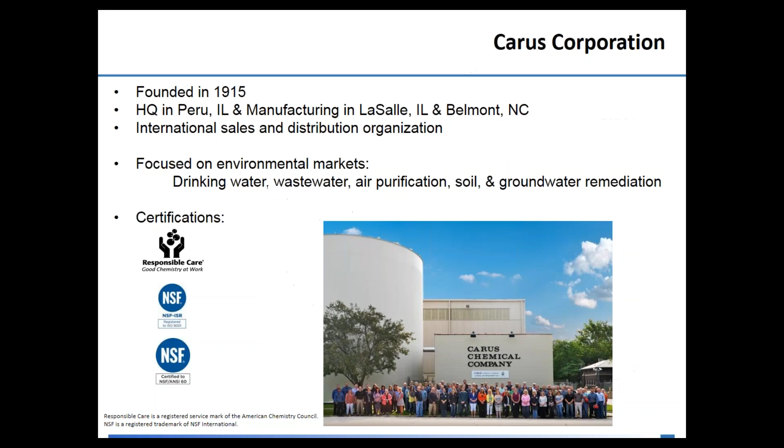So, Carus is located, as I said before, with headquarters in the US, close to Chicago. Then we have European offices in Spain, close to Oviedo. Then we have direct sales or sales through agents on a global scale. So we have representatives or distributors. We have just concluded a distribution agreement with South Africa, and we have many of these agreements through Europe and all the globe.

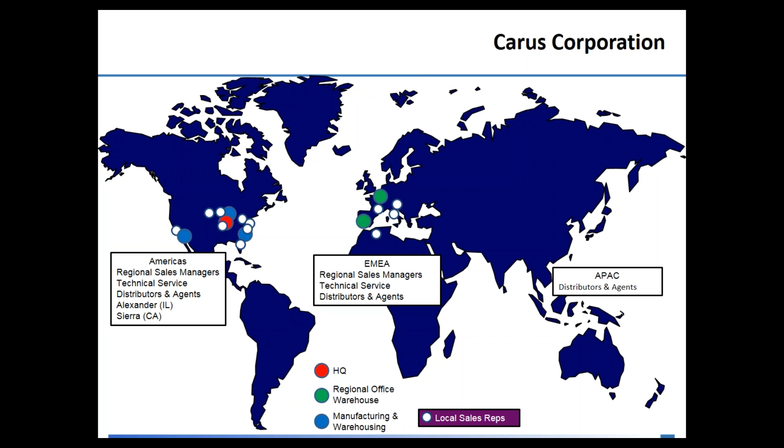Simplified science, this is our claim. So everybody knows remediation is complex. It's not exactly easy stuff. In situ remediation even more. So the idea of our technologies is to propose technology which makes things simple.

Simple doesn't mean inaccurate, but means that we try to provide chemicals that can be used in an easy way, because we know that when you are in the field, you cannot have too many things to do. So you have to be focused on in-field activities, you have to be focused on safety.

This is our portfolio of products. Chemical oxidation: we have permanganate-based products RemOx S and RemOx L. We have sustained release reagents based on permanganate, which is RemOx SR+, and Persulfate SR based on persulfate. Biological technologies: we have aerobic, IXPER and Oxygel; anaerobic, the Cap18 family of products, including Cap18Me and ABC-Ole.

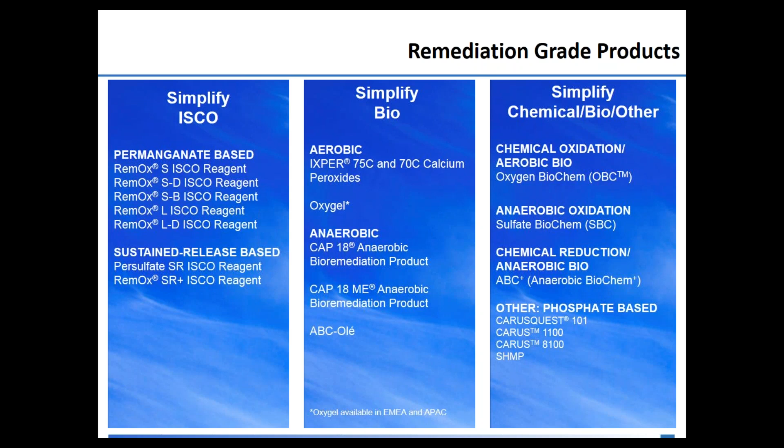And then we have OBC, which is the chemical oxidation aerobic bio based on activated persulfate, and SBC, which is a bioremediation product to stimulate sulfate reducing bacteria. Then the last product that we have is ABC Plus, which is anaerobic biochem. It's a carbon substrate additivated with zero valent iron for reductive dechlorination, mainly for chlorinated solvents.

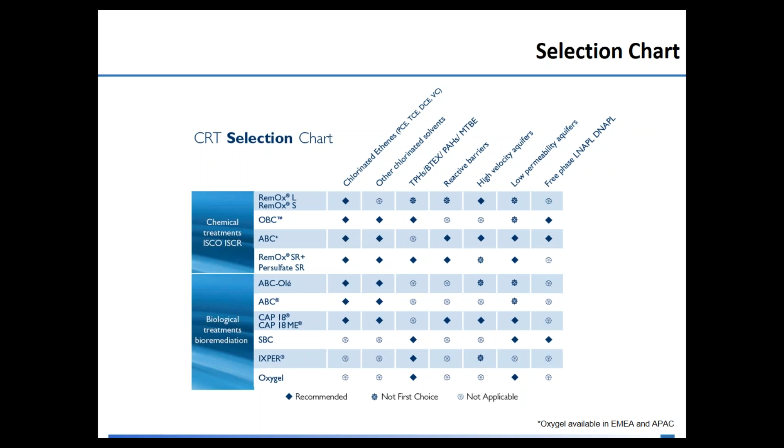Here is a selection chart that you can use for a preliminary screening of our technologies and of the contaminants of concern, of the issues that you can find. So for instance, if you follow the OBC line, you can see that OBC can be used with the chlorinated ethenes, other chlorinated, and you can use it with the TPHs. And the same with SBC, you can see where it is suggested and where it is not suggested.

Chemistry and biology. So today we will talk about a product which is OBC, which combines chemical and biological action, and we will talk about SBC, which is mainly a biological treatment. We know that the general perception of in situ treatment is that biology is much more friendly than chemistry. From the other side, biology can be much slower.

Coupling the two technologies allows us to get the best of each one, so we can work on the fast characteristic of the chemistry, coupled to the fact that the biological treatment is generally considered a mild treatment and can reach down to very low target levels.

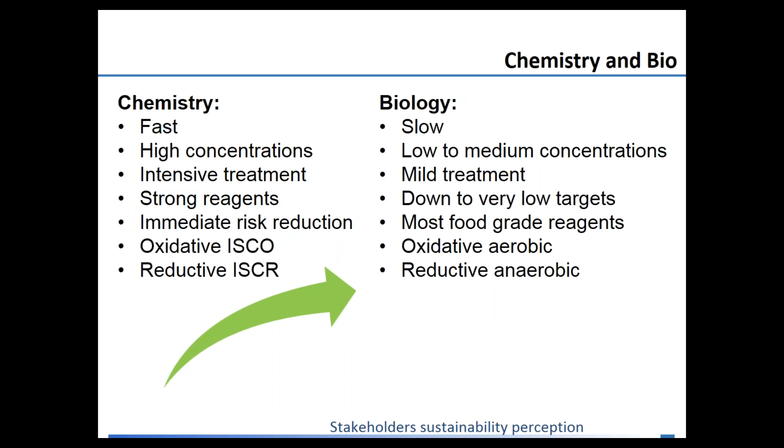The technology selection criteria mainly are based on concentration and area. We can consider the source area, where most of the contaminant mass is located, but with a very small plume size, and then outer areas that we can call plume areas, where mainly the contamination is dissolved, where we have a very big plume size, 75–20% of plume size, but the mass in the dissolved phase is much lower with respect to the source area.

This reflects on the kind of technology that you can apply. Of course, in the source area, which is small, you can use a technology that allows you to put a lot of effort, a lot of money, a lot of energy per cubic meter of soil, while in the other areas, different technologies which require a less intrusive, less invasive approach can be used.

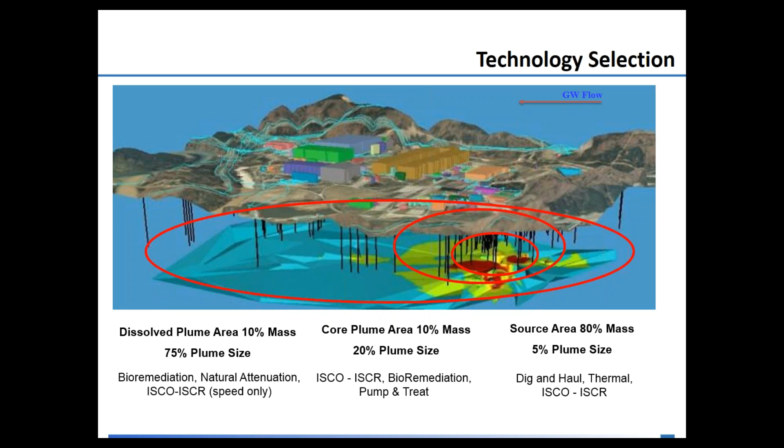So in the source area, you can use chemical oxidation. You can apply OBC, which is a product which has been designed for source area treatment, for dispersion on the bottom of excavation, for injection by direct push. And in the outer area, you can consider use of SBC to stimulate sulfate reducing bacteria, or sometimes you can also use OBC just to speed up the reactions.

I would like just to spend a few words talking about the mechanism of SBC, which is the sulfate BioChem. Just reminding that it's a bioremediation product. Mainly, it's a biostimulation product. So we provide something to the environment to increase the naturally occurring degradation rate. So mainly, we provide the optimal environment to bacteria to do their work and to destroy the contaminants. This is not a bioaugmentation treatment. Of course, you can bioaugment SBC, but this is not our business.

So, central dogma of bioremediation. We are on the first line. We are on the aerobic pathway, and on the left side, you see what happens for human beings. So, we eat food, we eat carbohydrates, and we breathe oxygen to get energy, and we produce wastes, and we get the energy for our life. Bacteria mainly do the same. So they eat the contaminant, in this case, let's say hydrocarbons. They breathe oxygen, and with this reaction, which is an oxidation-reduction reaction, they get energy for their life.

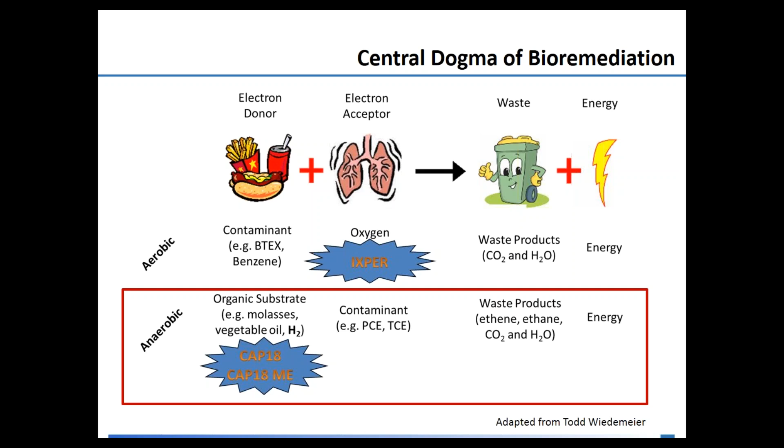Typically, we provide oxygen. So the traditional approach of this technology is to provide oxygen. And in the beginning of remediation history, air sparging or biosparging was the first technology applied. So injecting air into the aquifer, so that in the bubbling you can have a mass transfer of oxygen from the air to the water. This was not really efficient.

After that, the second step was the presence of powders releasing oxygen, which mainly are calcium peroxide, like the IXPER, which is provided by Carus, or use of nanogel releasing oxygen, which is Oxygel, which is another product that we can provide. The next step, the more promising one, is the biostimulation of sulfate-reducing bacteria. So

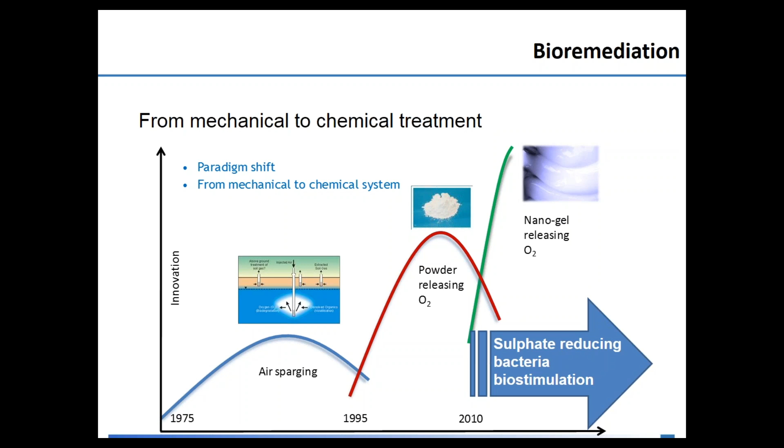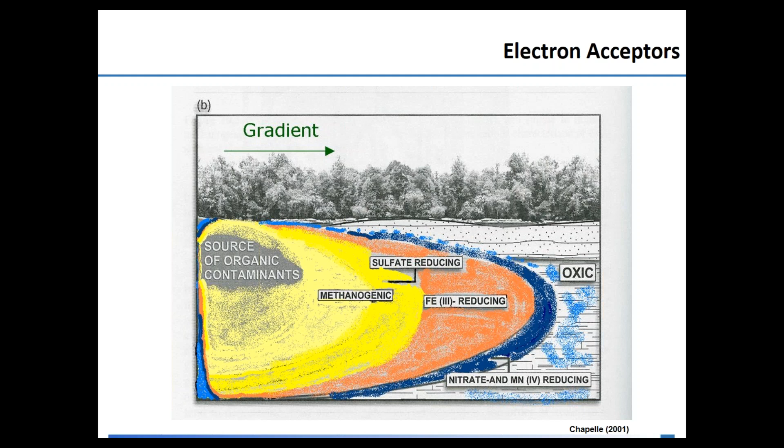When oxygen is finished, human beings die, but bacteria can take the oxygen, or better, can exchange electrons with other electron acceptors, so they can start to take oxygen from nitrate. They can reduce iron, and then they can go in sulfate reducing conditions. So bacteria, in this case some specific strains of bacteria, in particular sulfate reducing bacteria strains, can take the oxygen from the SO4 of the sulfates.

We always wonder whether these bacteria are there and whether they can work, and this is an example of a study of 74 sites impacted by gasoline before any remediation activity. It is 950 samples, and this study is focused on detecting the current electron acceptor situation on site. And this clearly shows that most sites are in sulfate reducing condition. Some of them are in nitrate reduction, few of them in aerobic, some also in methanogenesis condition, but most of sites are in this situation. So sulfate reducing conditions are a natural condition, and are very common in the environment.

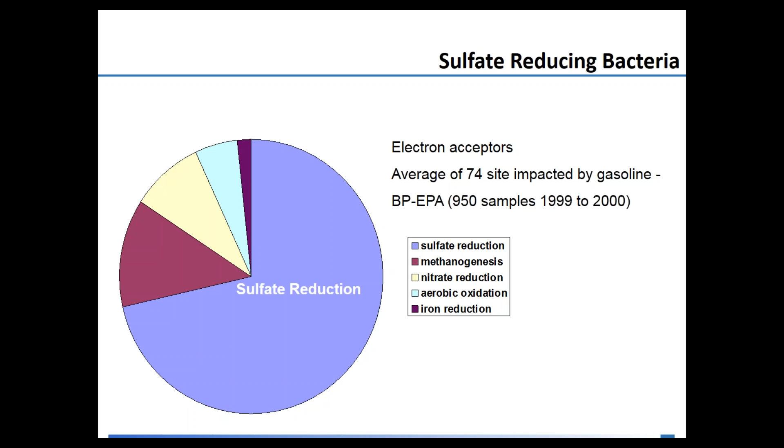These are two other graphs that show in which way the presence of sulfate can be correlated to the presence of contamination. In the top one, you see that concentration of benzene in wells has an inverse correlation with sulfate presence in wells. So when sulfate is not limiting, when you have a lot of sulfate, you usually do not see benzene, while when sulfate levels are very low, you can see presence of benzene. This shows that sulfate reducing conditions can work.

In the other one, in the bottom, you see the difference in terms of number of sites with high level of sulfate and low level of sulfate in plume. You see that there is a wide difference between the plume and the background, showing that there is presence of sulfate-reducing bacterial activity.

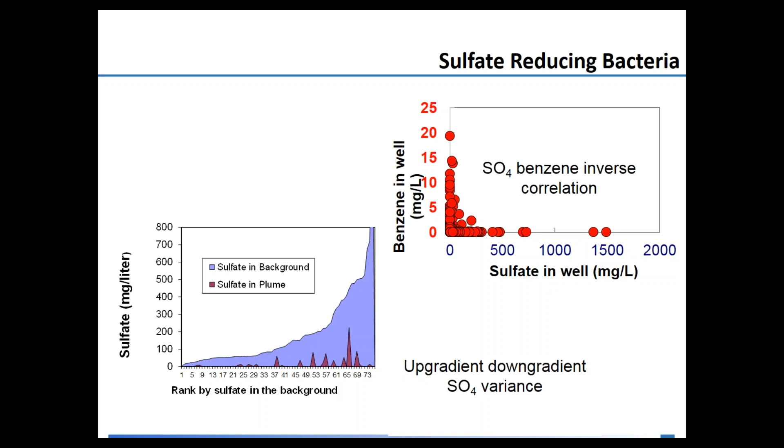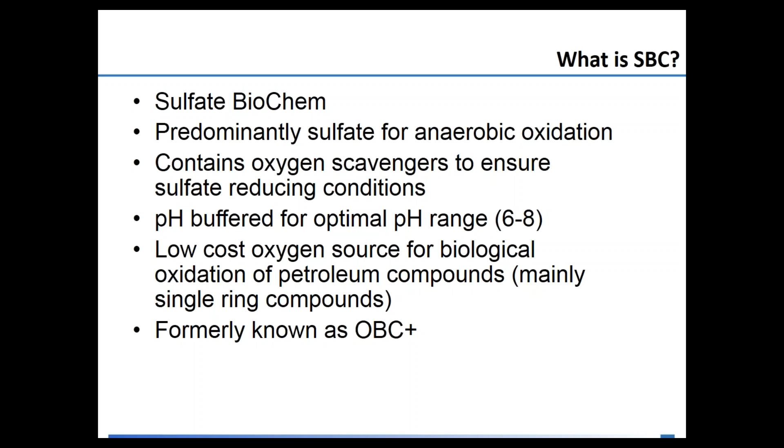Advantages: mainly that sulfate exists naturally in most groundwater, so what you are adding to the aquifer is something which is also naturally present. There is a very high solubility in comparison to other electron acceptors such as oxygen release powders or gels. This means that when you add oxygen, you can have maximum milligrams per liter of oxygen in your groundwater. When you use Sulfate BioChem, you can go at least 3 orders of magnitude, so you can have several grams per liter of oxygen. This means that oxygen doesn't become limiting.

We have an optimal redox condition and pH provided by buffer and additive. The cost is lower and the results are surprisingly rapid, and this is because you have a huge amount of oxygen made available for bacteria, and you don't have any infrastructure except injection wells. It is safe, it is not an oxidizer, it is easy to handle, it is a powder that can be diluted in water in a very easy, simple way.

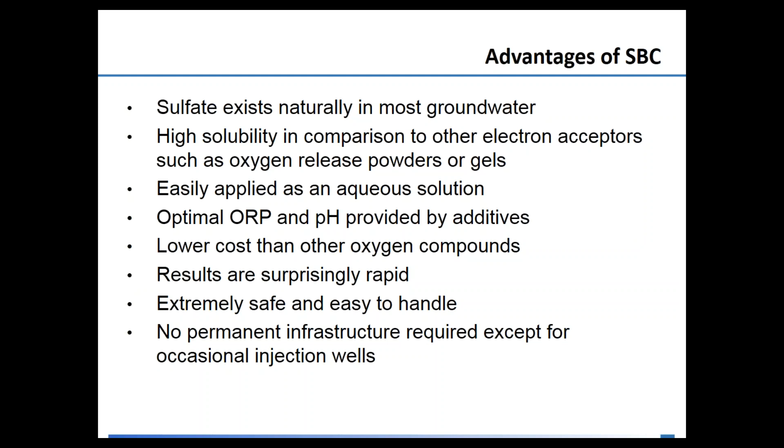This is a table that summarizes some common misconceptions. The first one, of course, says that biodegradation of hydrocarbons requires aerobic conditions, and as shown before, this is not true, and there are data that show that also sulfate-reducing conditions can work. This is not, sorry, in situ oxidation. This is biology, and the sulfate ion doesn't work like the persulfate radical. This is just stimulation of naturally occurring biological processes.

Anaerobic biodegradation is too slow. Of course, if you consider only theoretical and thermodynamic data, the anaerobic biodegradation is slow, but the availability of high concentration of oxygen as sulfate makes the overall results very interesting and very fast.

Hydrogen sulfide can be generated, but at the natural pH of aquifers it is sequestered by metals present, so you have also an effect of precipitation of metals, which is beneficial to the environment. And hydrogen sulfide is very rare also because it reacts very quickly with naturally occurring matter in the soil, reacts with the constituents of soil, so it's very unusual to detect hydrogen sulfide.

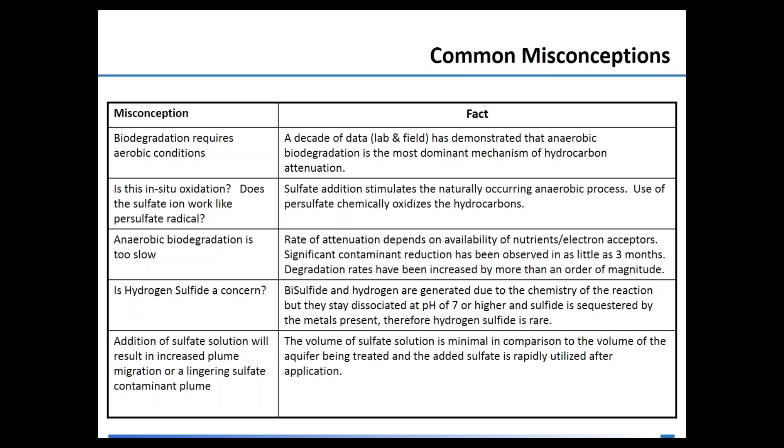Of course, the volume of sulfate which is injected is minimal in comparison to the volume of the aquifer, and it is quickly used, so there are no issues of presence of sulfate. Just a simple case study. We are working on some other case studies, but this is one of the traditional ones that we present.

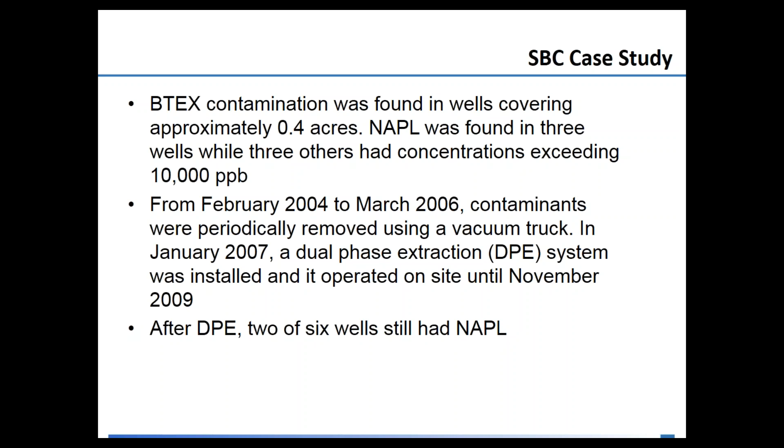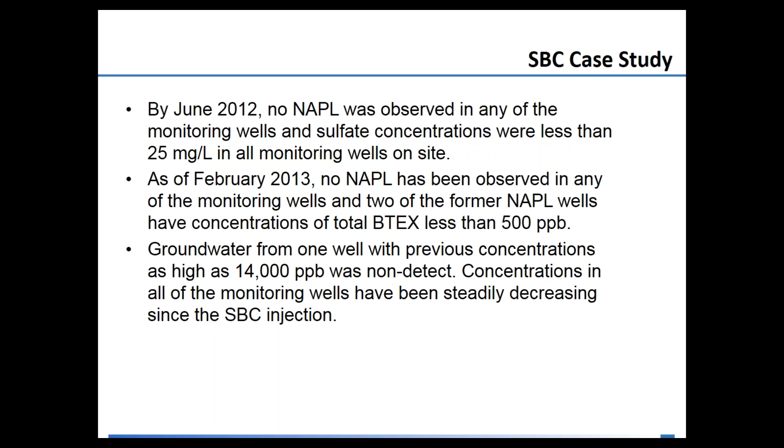After injection, by June 2012, no free phase was observed in the monitoring wells, and sulfate concentrations were less than 25 milligrams per liter, showing that bacteria have been able to reduce free phase presence while consuming sulfate. And at the end, BTEX values were lower than 500 ppb. The last one is an example of one of the wells, probably one of the best, from 14,000 ppb to non-detectable, and still decreasing because of the presence of sulfate.

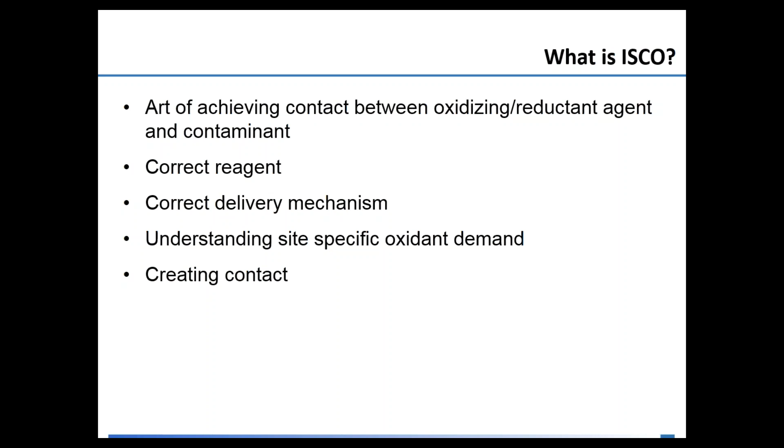After talking about SBC, I would like to talk about Oxidation BioChem, and I will spend a few words about chemical oxidation. OBC, Oxidation BioChem, is an in situ chemical oxidation reagent, and mainly it is activated persulfate. Remember, chemical oxidation is a technology that requires contact between the oxidizing agent and the contaminant, and the major points are to choose the right reagent, to choose the delivery mechanism, and to understand the site-specific demand to create contact. Contact is the key point, because with this chemistry you have at the same time, in the same place, the oxidant and the contaminant.

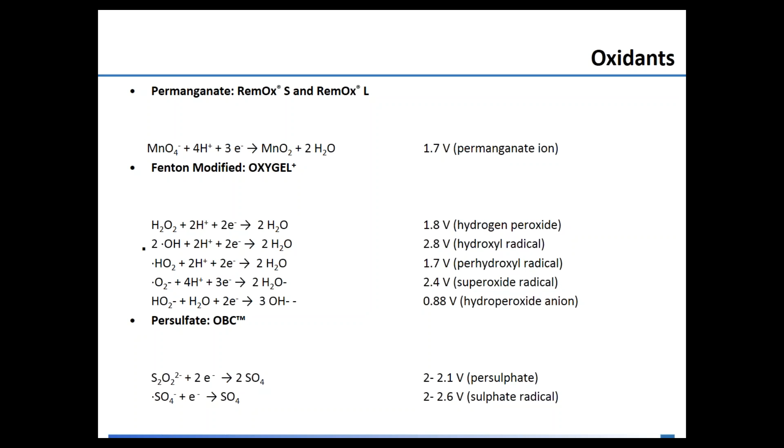These are the oxidants that we usually use. It's permanganate, which is our traditional RemOx, which works mainly for chlorinated solvents. We have modified Fenton, which is Oxygel, which has a very wide range of contaminants that can be treated. And then we have OBC, the activated persulfate, which is mainly targeted to TPH treatment, but works really well also on chlorinated solvents and chloromethanes.

Activation. We always talk about activated persulfate. So why do we talk about activation for persulfate? Because the persulfate ion by itself has a redox potential of 2.01 volts, and this is the direct oxidation reaction. It's similar to the reaction that happens with permanganate, with a different redox potential. We saw in the previous slide that the redox potential of permanganate in the first line is 1.7, while the persulfate ion, the direct one, is only 2 or 2.1.

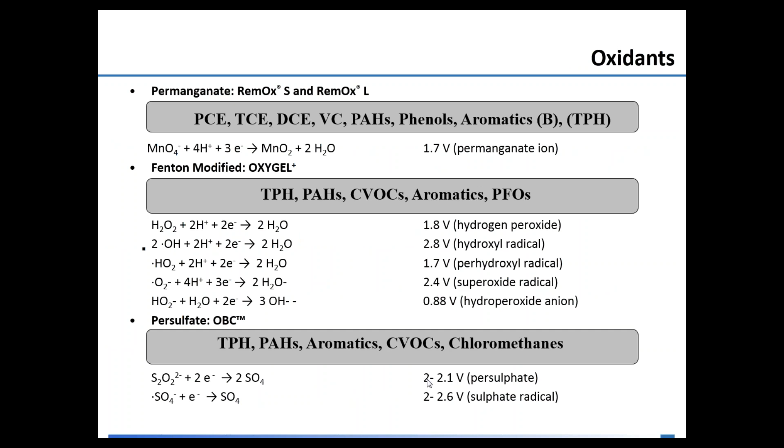It has been shown that in certain conditions, when persulfate radicals are produced, the redox potential rises up to 2.6 volts. This means that you can oxidize also chemicals that have a higher potential of oxidation. In addition, the radicals are much faster than the ion reaction, and this results in faster consumption, less presence of byproducts, and in general a much more efficient treatment.

And these radicals are produced in the presence of an activating agent, which typically can be temperature, can be pH, can be the presence of chelated metals like iron, or can be the presence of hydrogen peroxide.

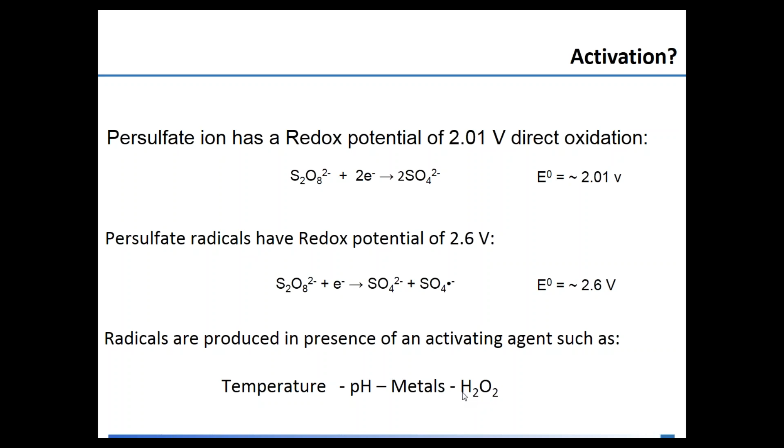There are some competing reactions. Sorry, I missed it. Okay, there are also some competing reactions, which are mainly reactions with the inorganic and organic demand. So we call these scavenger reactions natural oxidant demand, and they are quite important because they are quite faster with respect to target compound mineralization.

In addition, we have to consider the oxidant decomposition, which is negligible for permanganate, but is quite important for persulfate, in particular for activated persulfate. So you have to consider that activated persulfate can stay active in the subsoil for a maximum of a couple of months.

So how much to inject? The dose evaluation runs through two steps. Mainly it is to evaluate the soil oxidant demand. Evaluate soil oxidant demand, and we usually recommend to consider, if you don't have any site-specific data, 1 kilogram of OBC per ton of soil.

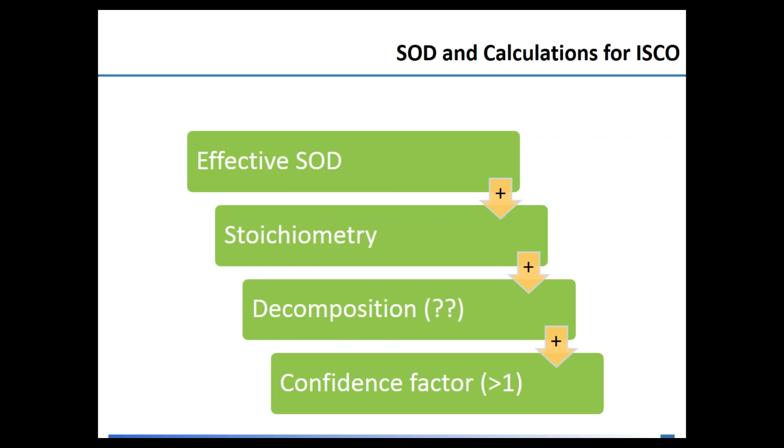So finally, what is OBC? Oxidation BioChem is a patented combination of sodium persulfate and food-grade calcium peroxide in one product. So you don't need to wait for anything in the field. It is just one product that you dissolve in water and you inject.

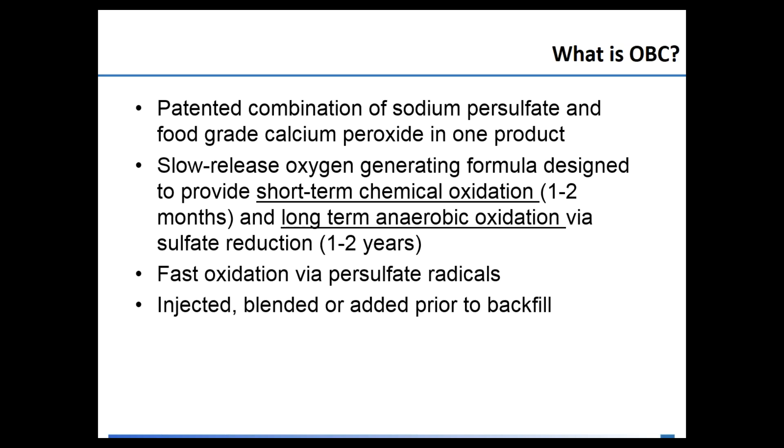The slow-release oxygen generating formula of the calcium peroxide helps to have 1 to 2 months of chemical oxidation and then a long-term anaerobic oxidation via sulfate reduction. So the fast part is the persulfate radical and the slower part is the biology. And this can be injected, blended, or added prior to backfill when you have tanks pulled up.

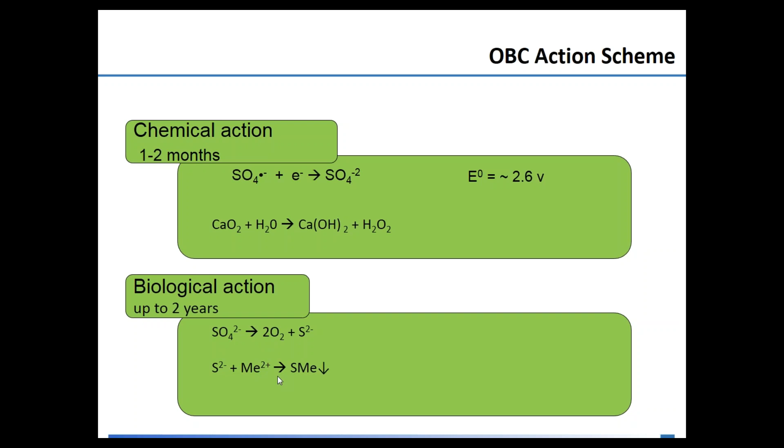The action scheme, just to summarize, is activation of persulfate by calcium peroxide giving H2O2 and driving the pH up to 12 to 14. So we have a double activation by hydrogen peroxide and pH. And when OBC is depleted, you have a biological action which can be both by presence of oxygen from calcium peroxide still releasing, but mainly comes from the presence of SO4, which can be used by bacteria in the same way as SBC works. So this mechanism is the typical mechanism of chemical oxidation by activated persulfate, and this way is the same biological action as the SBC.

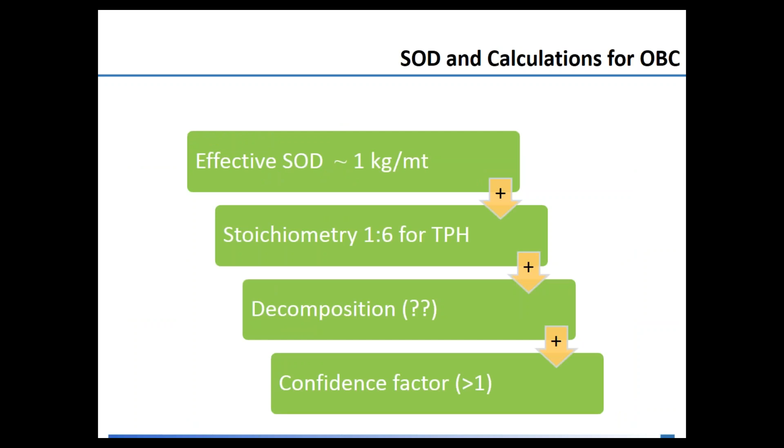This is a summary of the calculation I told you before. So effective SOD 1 kilogram per metric ton, stoichiometry 1 to 6.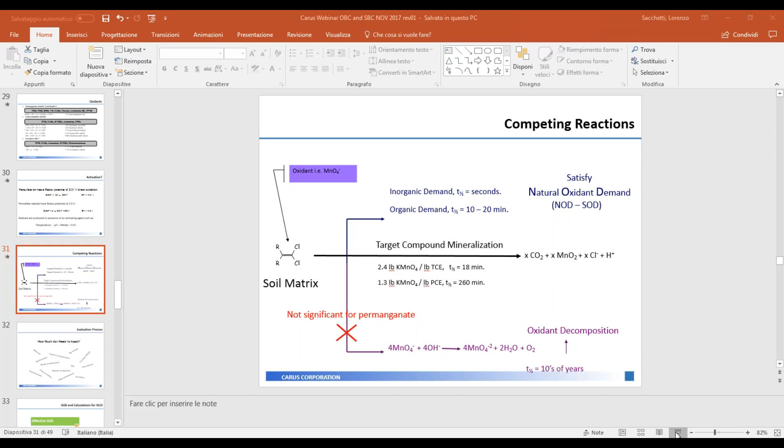Let's resume now with an OBC case study. This is a case study coming from the United Kingdom. It's a renewable energy plant in Port Clarence, an old industrial area in the UK. There is a long historical land use which includes oil refineries, salt works, railways. So it's a very, very impacted site. It's very close to iron steel works, a gas works, a tar distillery, very close to a river.

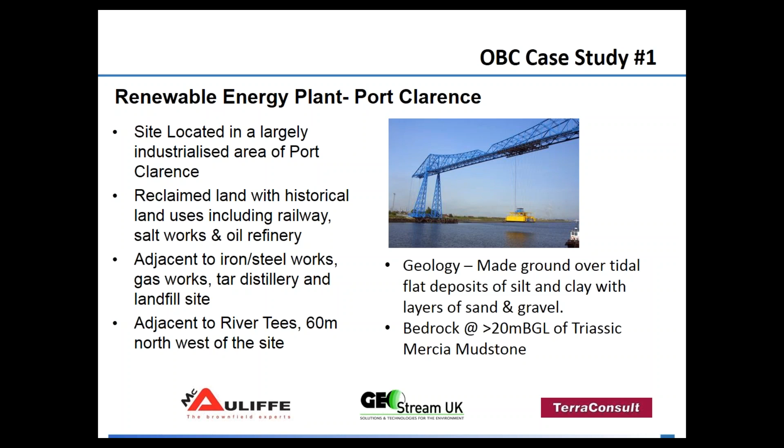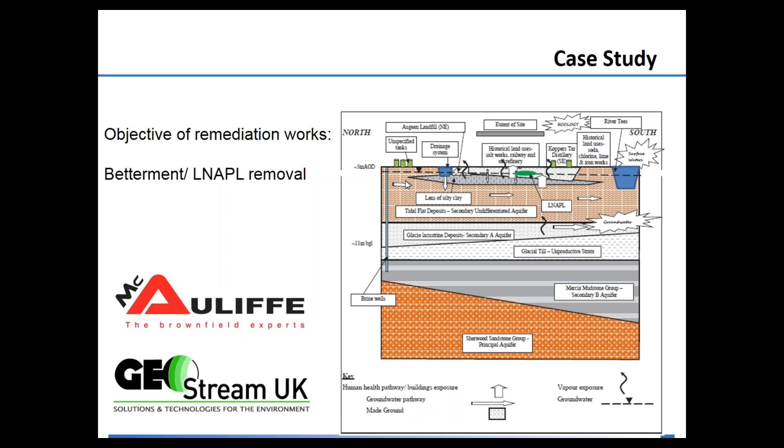Mainly the geology is made ground with tidal deposits and bedrock after 20 meters below ground level. As you see, geology is quite complex. We have the primary source of contamination on the top, and then you see that this impact generated some LNAPL and then an impact on groundwater. And the target was free phase removal and general betterment of groundwater concentration.

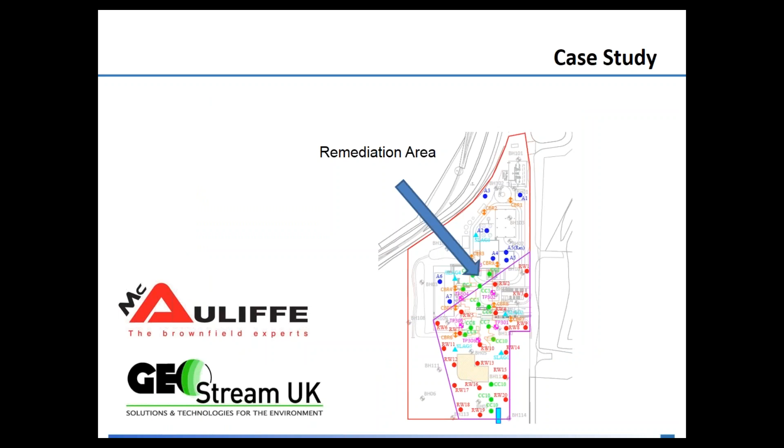The strategy carried out by Geostream UK, which is one of our partners in the UK, is to start with physical treatment and finish with chemical and biological treatment. So in this remediation area, they started with a 10-week intensive program of physical treatment and free-phase removal. This was mainly due to the fact that free phase present requires more chemicals, and so it was evaluated that a vacuum extraction system would have been more interesting from an economical point of view and cheaper.

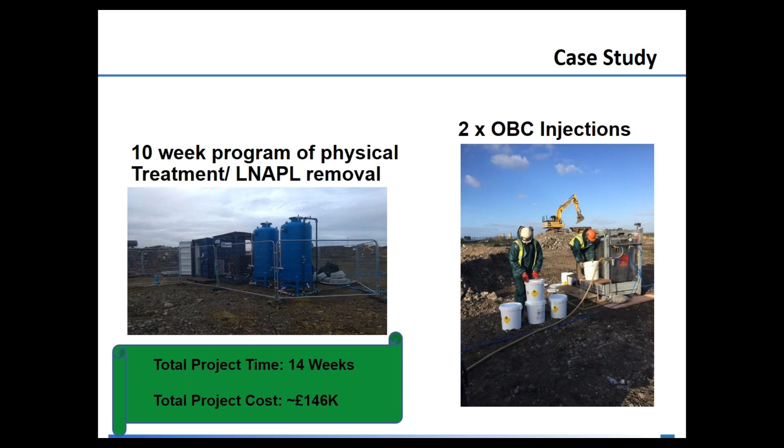And after 10 weeks of removal, so very rough removal, they started with a couple of injection rounds of OBC. As you will see, the total project cost is extremely low, and these are the results. So in general, you can see that from the baseline, which is the first value, to the post-treatment, results are extremely interesting. I would draw your attention to well RW15 because it suggests an alternative way to use OBC.

In this case, you see that after a pump and treat, you had a decrease of concentration in milligram per liter, but after the first injection, you had a peak of contamination. This is mainly because OBC, when underdosed, has the characteristic of working on the organic matter and breaking the hydrocarbon molecules and moving pH to 12 to 14. The result of this is that you enhance the mobilization of adsorbed hydrocarbons, and in general, you can also enhance the mobilization of free phase.

So after the first injection, you can see, and we've seen it at least at a couple of sites, an increase of concentration, but after the second injection, and mainly after post-treatment, concentration reduces. So we would say that in this way, you have the effect of chemical oxidation, and then the results of the following action of biological treatment. This approach of using OBC for mobilization of free product and adsorbed product has been used sometimes.

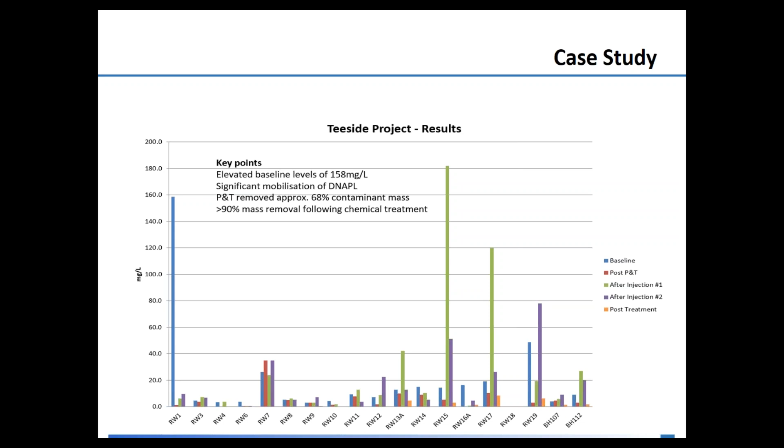We have some clients that use some partial and modest injection of OBC in wells just to mobilize contaminants and to recover them by vacuum truck or by pump and treat or by multi-phase extraction. This is something which is very low cost and has very good results in terms of mass of contaminants physically removed after the first chemical injection.

This is another case study, a case study which comes from the United States. You will see that in the piloting phase, we had very good results in terms of destruction of benzene, MTBE, and toluene. And you see also after the full-scale treatment, results are extremely good. You start from 2,000 to 220, so in general, you can have a strong reduction on your site.

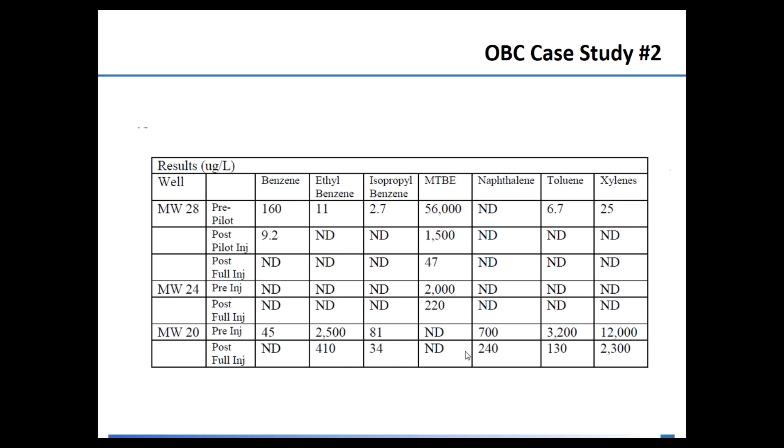So, as a summary, OBC Oxygen BioChem is a good example of a combined chemical and biological treatment train. So, a couple of months of chemistry and then biological working, and it's a very well accepted treatment because the presence of biology helps approval by control bodies and stakeholders. It doesn't require activation or pH control. OBC is self-activating. You don't need to check pH.

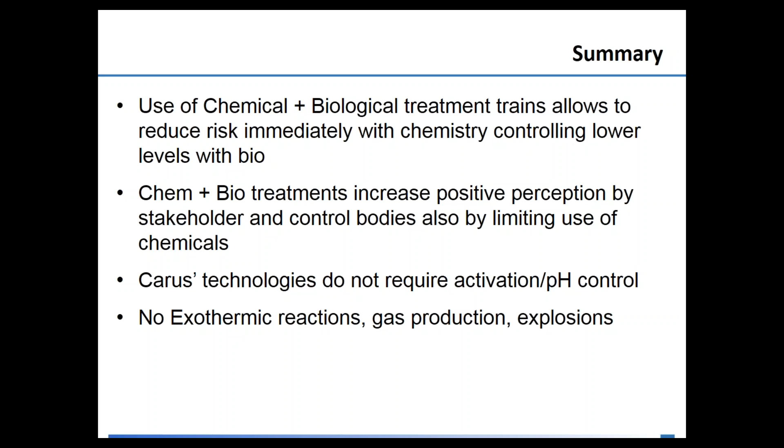You don't need to first inject metals or activator. It's two components in one drum. So you need just to dissolve the OBC in water and then inject. No explosion, no gas production, no exothermic reaction, because it's activated persulfate and not a Fenton reaction. So that's all from my side.